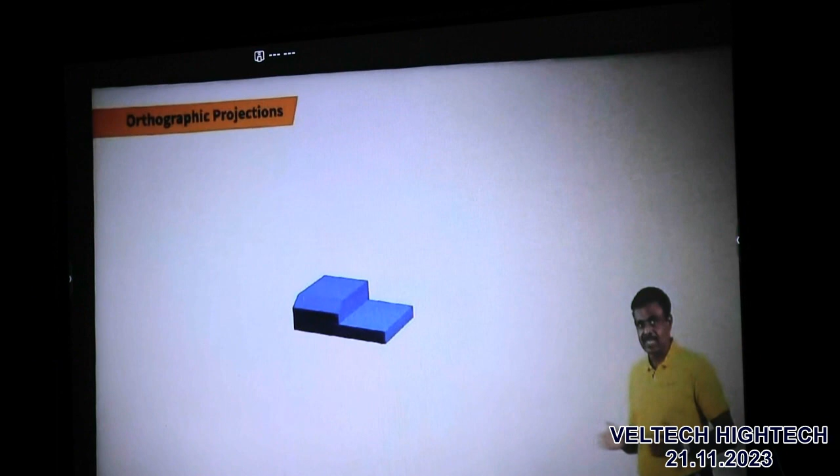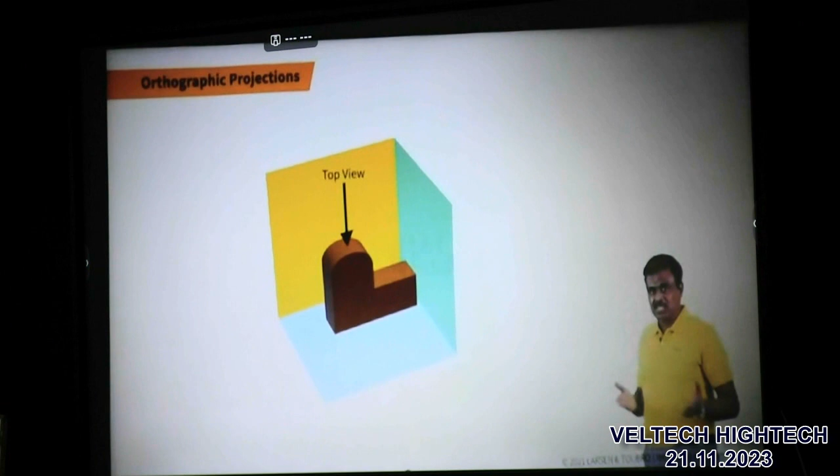Remember and recall the 6 primary views of the orthographic projections. They are top view, front view, left side view, right side view, bottom view, and rear view. Normally, the top, front, and left or right side views are drawn to describe any engineering object.

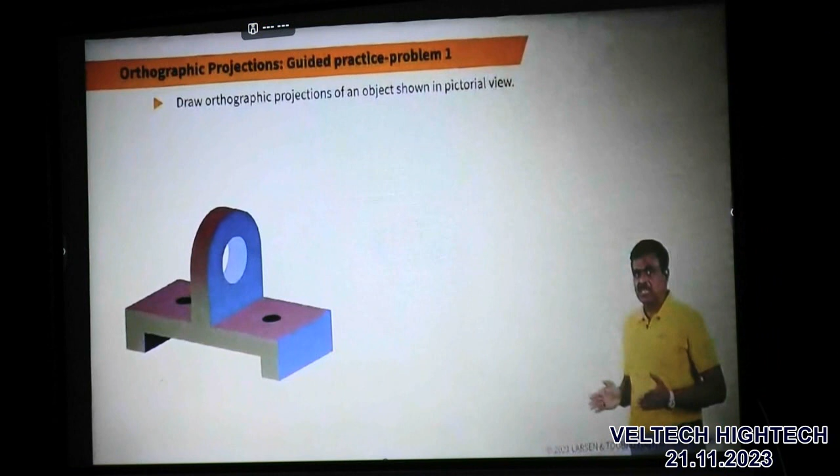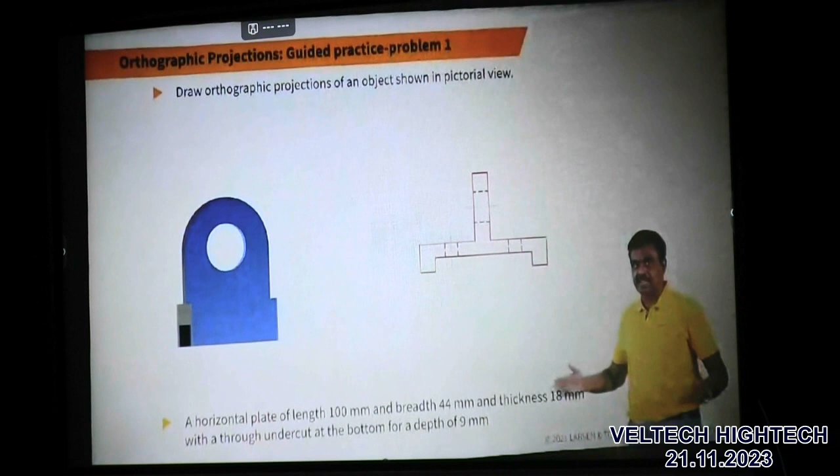Draw orthographic projections of an object shown in pictorial view. Observe and understand the shape and complexity of the given object. It consists of a horizontal plate of length 100 mm and breadth 44 mm and a thickness 18 mm with a through undercut at the bottom for a depth of 9 mm.

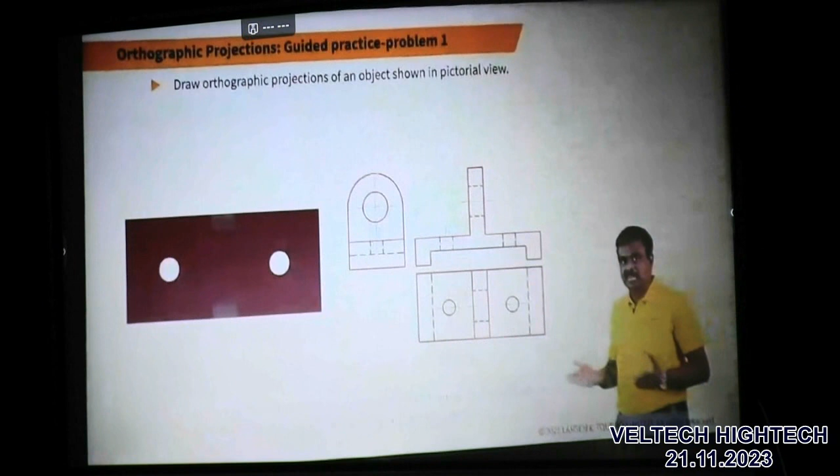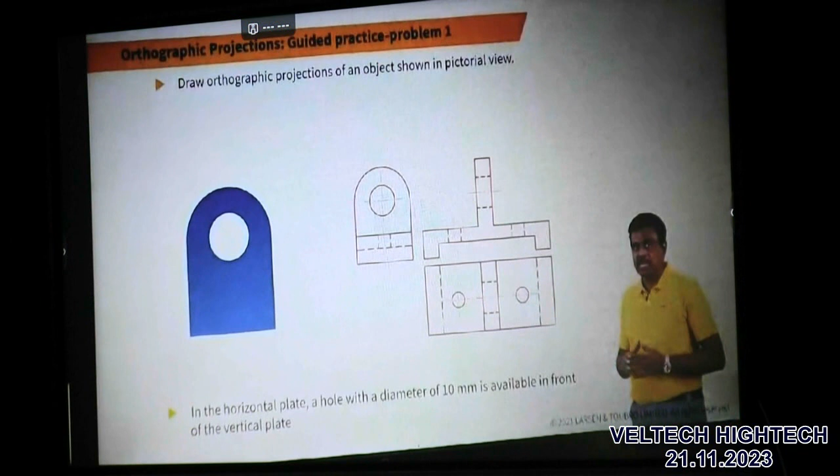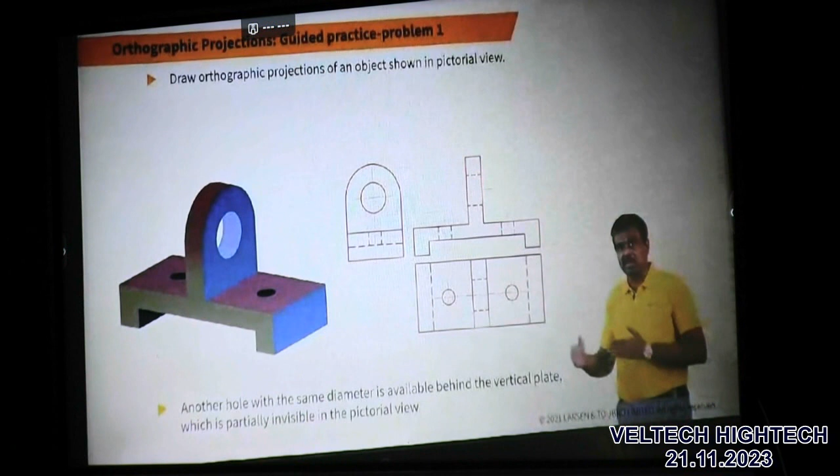A vertical plate with a semicircular portion at the middle of the horizontal plate having a through hole of diameter 20 mm. In the horizontal plate, a hole with a diameter of 10 mm is available in front of the vertical plate. And another hole in the same diameter is available behind the vertical plate, which is partially invisible in the pictorial view.

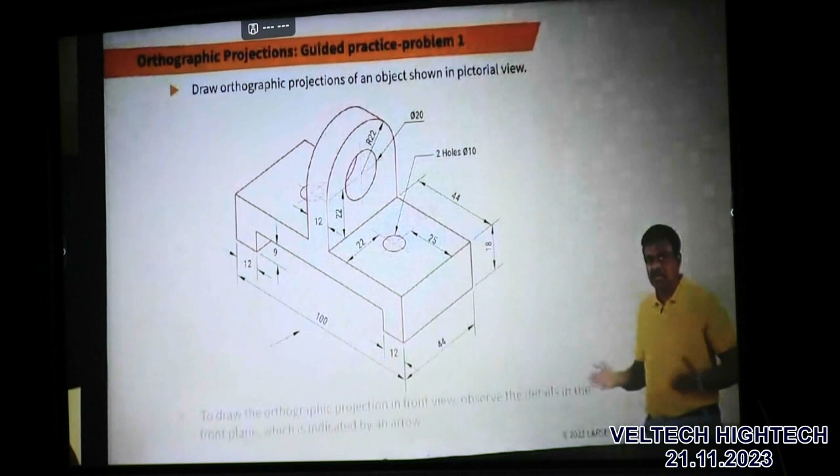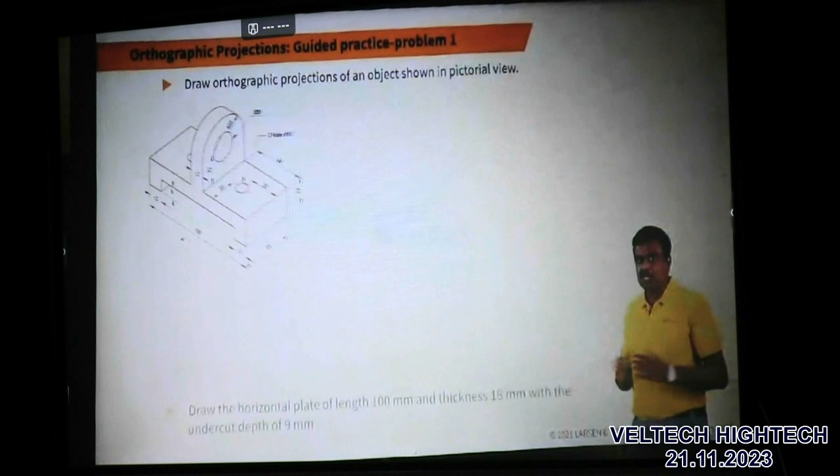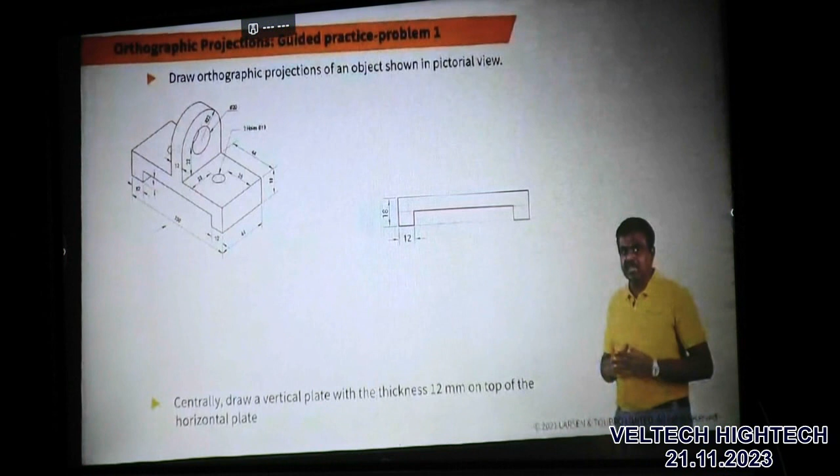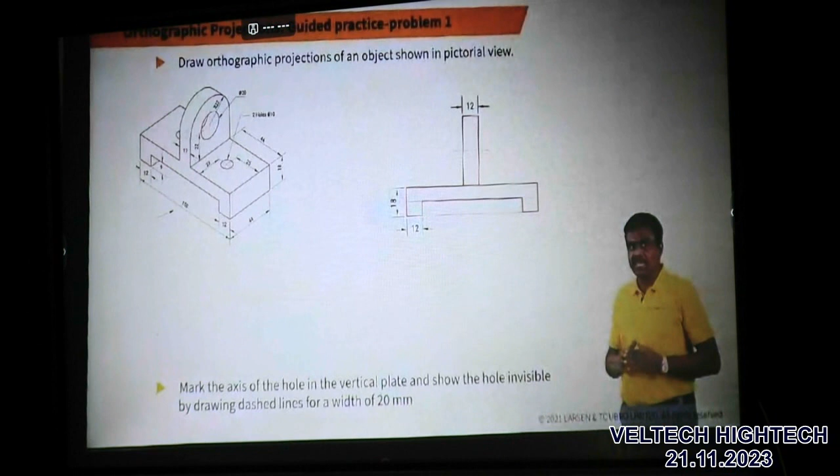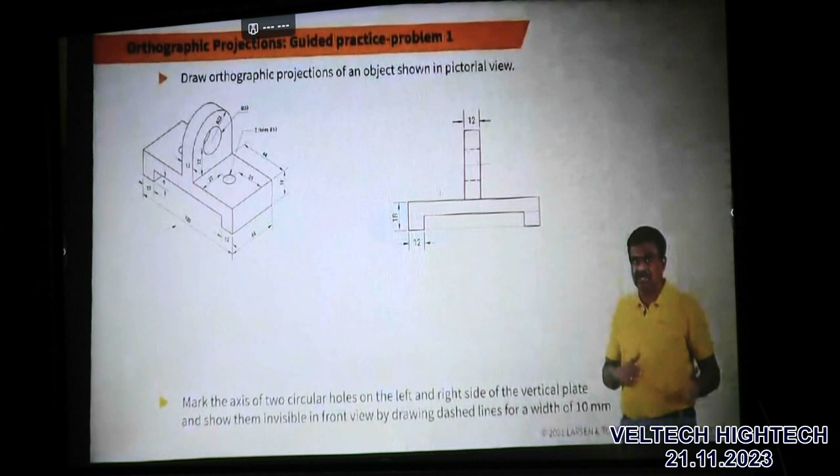Mark the axis of two circular holes on the left and right side of the vertical plate and show them invisible in front view by drawing dashed lines for a width of 10 mm.

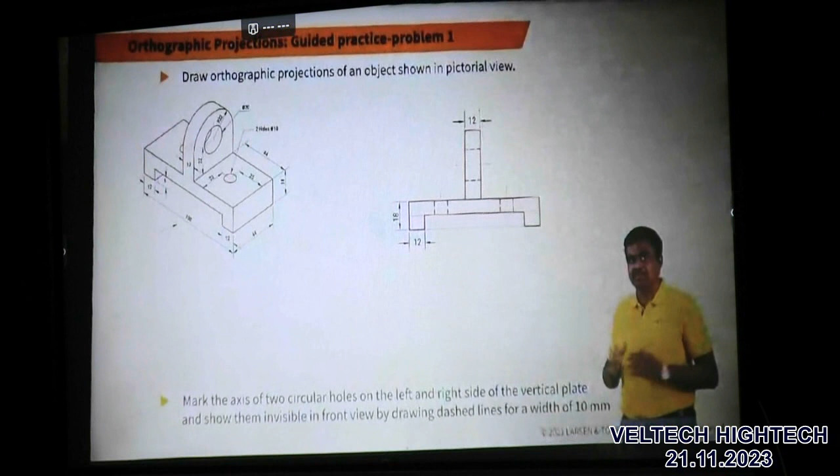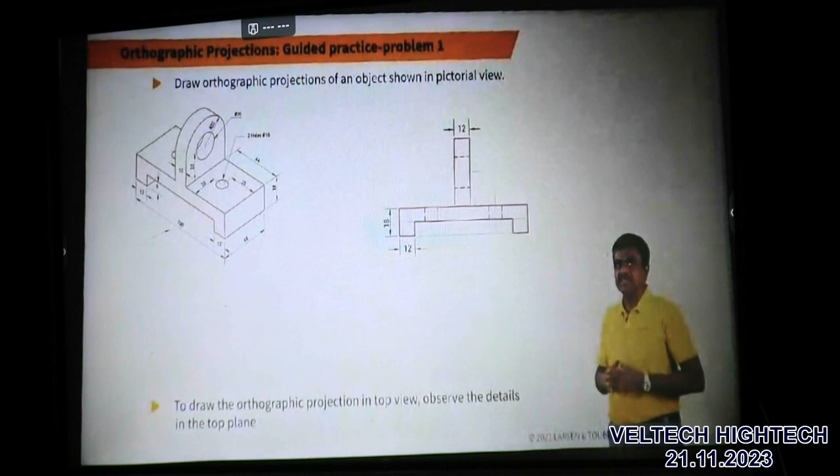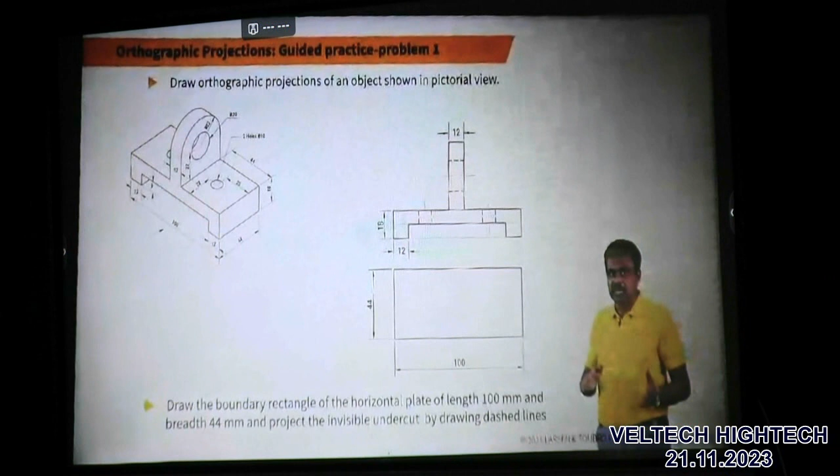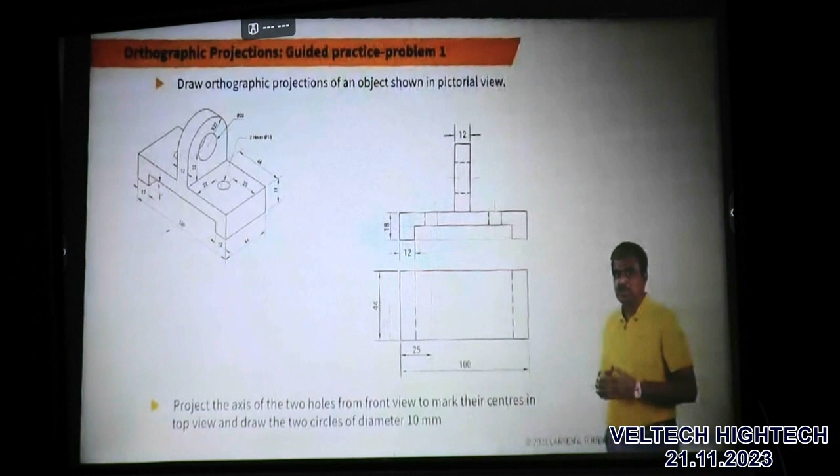The steps to draw the top view are: to draw the orthographic projection in top view, observe the details in the top plane. Draw the boundary rectangle of the horizontal plate of length 100 mm and breadth 44 mm and project the invisible undercut by drawing dashed lines. Project the axis of the two holes from front view to mark the centers in the top view and draw the two circles of diameter 10 mm.

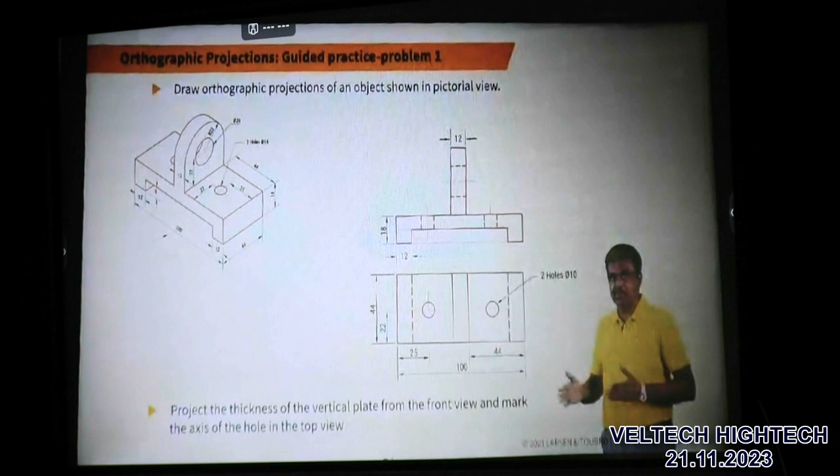Project the thickness of the vertical plate from the front view and mark the axis of the hole in the top view. Since the hole is invisible in the top view, it is shown using dashed lines for a width of 20 mm.

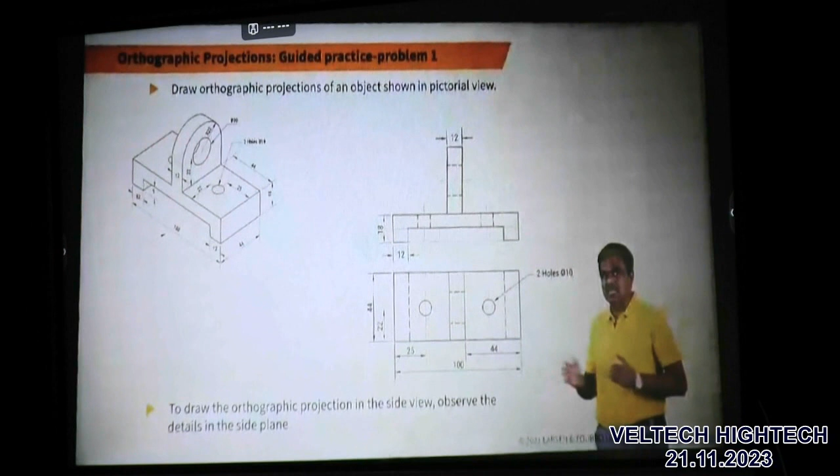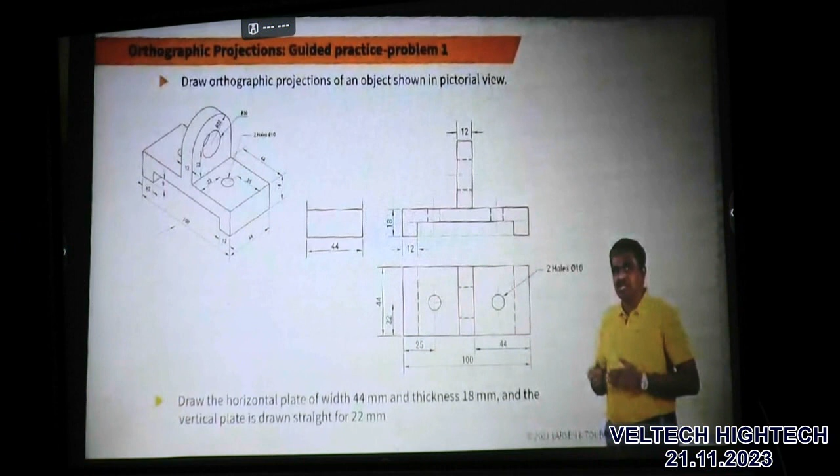The steps to draw the right side view are: to draw the orthographic projection in the right side view, observe the details in the side plane. Draw the horizontal plate of width of 44 mm and thickness 18 mm, and the vertical plate is drawn straight for 22 mm, and thereafter draw a semicircle with a radius of 22 mm.

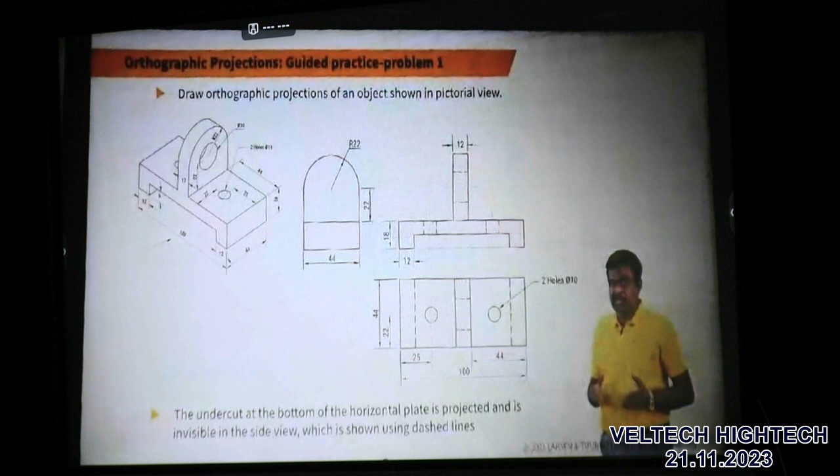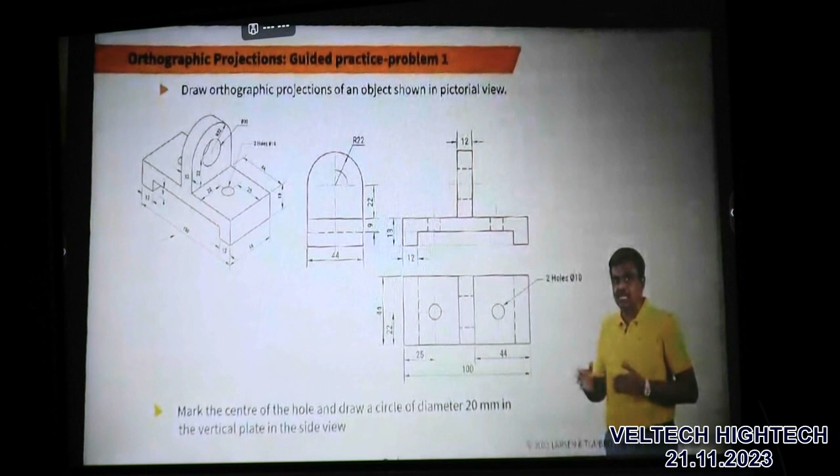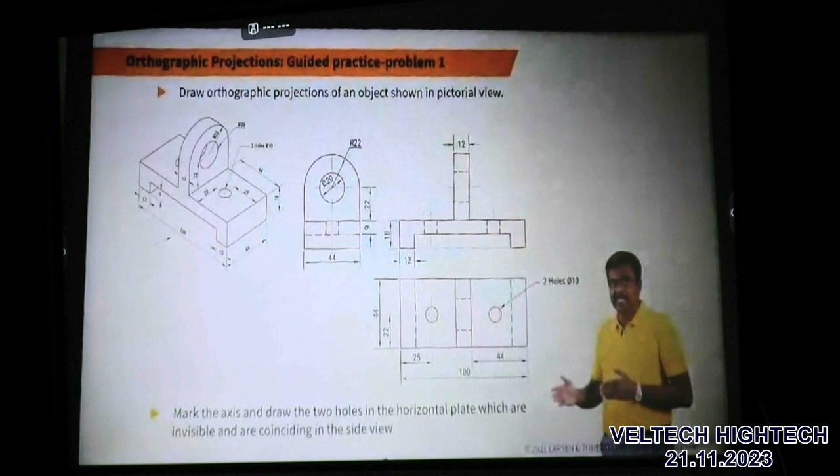The undercut at the bottom of the horizontal plate is projected and is invisible in the side view, which is shown using dashed lines. Mark the center of the hole and draw a circle of diameter 20 mm in the vertical plate in the side view. Mark the axis and draw the two holes in the horizontal plate which are invisible and are coinciding in the side view. And it is drawn using dashed lines for a width of 10 mm.

The next object is a straight line. The straight line can be kept in different positions with reference to the reference planes. How many positions can I place the straight line in? Excuse me.